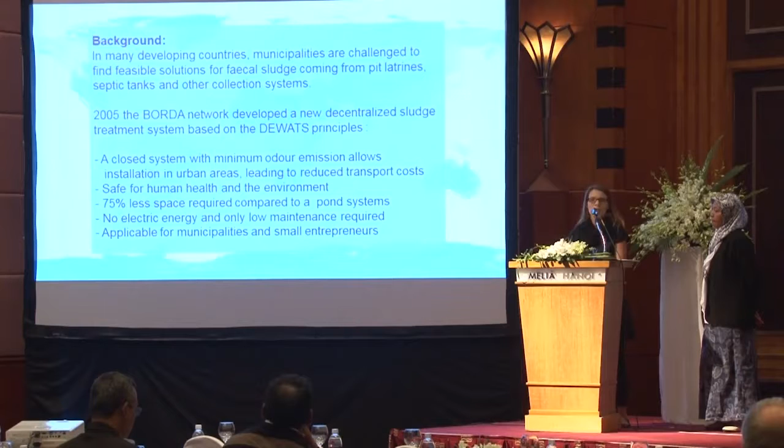Yes, as you know, the topic for today is how can municipalities or how can we ensure a safe and healthy fecal sludge treatment? This is the question, and our experience from BORDA Indonesia started about 10 years ago, so I guess this is quite an interesting presentation to see how things can develop over 1 decade.

What BORDA did in 2004-2005, we developed a demand-responsive sludge treatment plant for municipalities in order to complement the DEWATS systems we are implementing in our projects, basically CBS projects, community-based sanitation projects, to make sure that the disposal and the processing of septic urban sludge is done well.

So the treatment plants we developed are basically for small and medium-sized cities, and they collect septage from urban areas, on-site systems such as septic tanks, pit latrines, but also from our CBS projects. And they include biogas generation opportunity as well as composting opportunities.

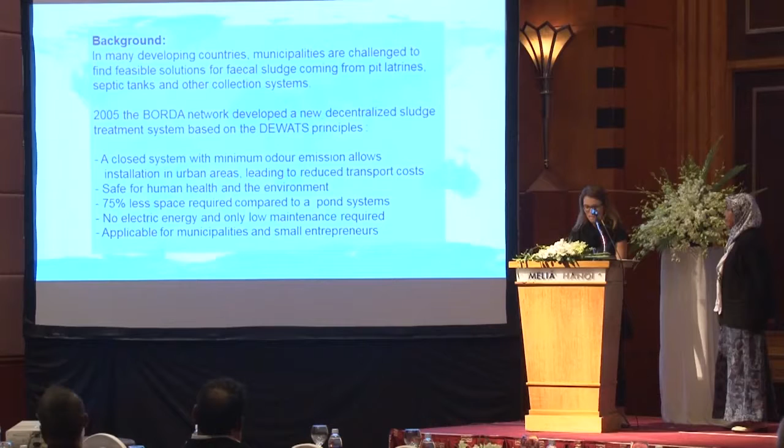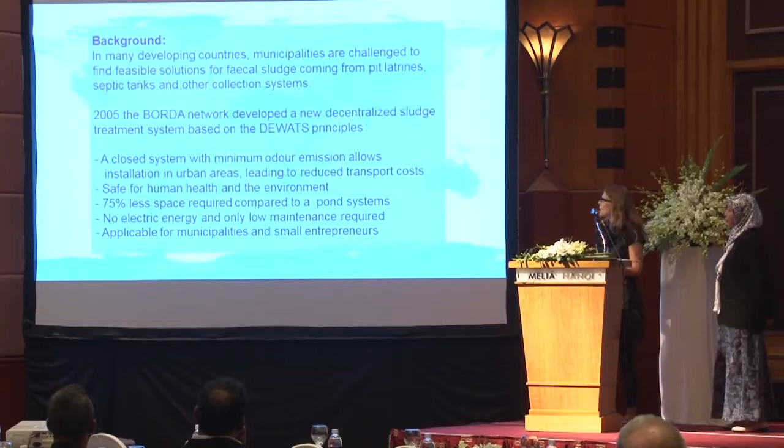So, in contrary to the, at that time, existing common treatment plant systems, our systems allow, as you can see on the screen, emission of odor to a minimum because it's a closed system. So it's easy to install in urban areas, which also reduces the transportation costs of the sludge. Besides, this leads to an increase of human health and environmental protection.

Yes, and also they would need less space than the common pond systems. Furthermore, less electricity or no electricity, and low maintenance is required.

So what were the challenges we are facing, or that we are still facing, in implementing such treatment plant systems in Indonesia? I think in most of the presentations, the aspects were mentioned already, but I will highlight them anyways again. So depending on the different kind of system or location, conditions in the surrounding area, we need to consider this when creating or developing a system. Besides, transportation costs are a key factor.

Besides this, as you heard already, the disposal of sludge often happens illegally, so the sludge is just disposed into the rivers. Furthermore, there's a lack of regulations. So also in Indonesia, there is no clear structure who is responsible, who should do what. In some cities there are, but it's not really connected and it's also not enforced. Besides, we need to think about how do we provide incentives for the service providers, basically the private sector.

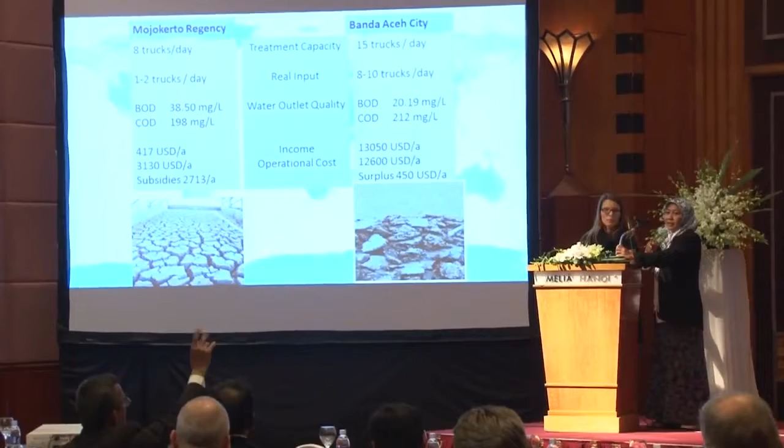That's the last question for the session. I'm sure there are plenty of questions. We can either do it over the break, or we have time after the other presentations to discuss. So, thank you for your presentation. I'm Susanna from University of Delaware.

I think you mentioned that these treatment plants are within the city limits, and I just want to know if there are any odor problems which the city faces, and if there is any backlash after a decade when you have reached the potential for wastewater treatment plants.

Thank you for the question. In the first slide, I think, we mentioned already that 80% of our treatment plant is a closed plant. So this is an anaerobic system. And then the effluent will flow to the planted gravel filter, the first open system, and then the maturation pond. So with this system, one of the advantages is that the odor is already reduced. And anyway, the treatment plant is located in the dump site. Yeah. So still nobody complains about the odor.

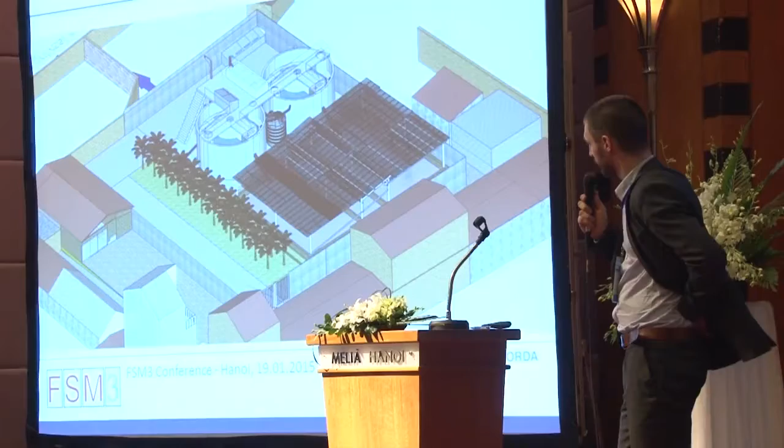Also, depending on the systems we are talking about, let me show you the backup slide here. That's a system which is also planned in Antananarivo, really in the urban area, and we really try to keep it very, very compact. This is 25 by 25 meters, where we also have a high groundwater level, so the digesters are constructed above ground with displacement tanks on top of the digesters.

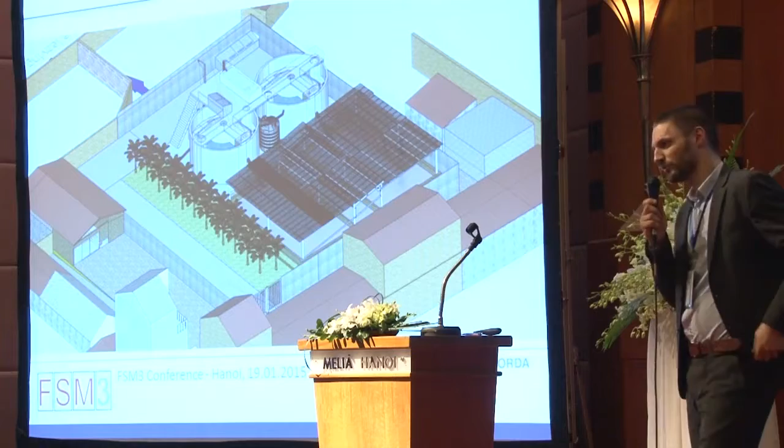So it's really ranging from what land is available. The more land we have available, and with low prices for the land, it's good to space it out more to have, for example, more drying space. So it really ranges. I can't tell you right now the number of square meters per fecal sludge treated.

Thank you. And there's the last question. So from your presentation, I understand that the main reason you wanted to switch to anaerobic digestion systems is because the ABR system did not work well, was sensitive to peak load, but you can make the same argument for anaerobic digestion-based systems, and in fact they're much more complex. Another point is if the starting material is septic sludge, that's already sludge that is anaerobically digested. So you are already losing the biogas, the readily digestible material is already lost.

And so from your presentation, I understand that one of the driving forces for choosing anaerobic digestion is also the biogas generation. But in the end, I do not know if this system would be feasible or if it would be an improvement over the first system that you started.

Thanks. Well, first maybe there was a misunderstanding with the ABR, because whether it's the ABR or biogas digesters, we have both anaerobic systems. The ABR in this case was only identified as not suitable for peak loads, since it is forcing the sludge all the way through the whole volume, flushing out the sludge. So that's the reason why we are right now not sticking with the ABR.

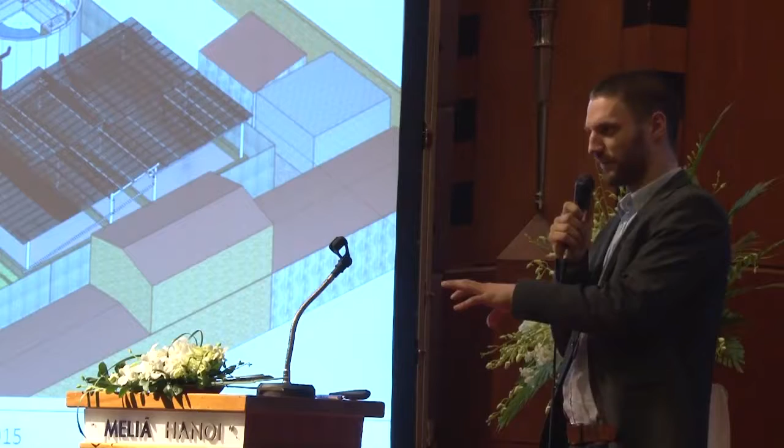And with the double biogas approach, we are trying to accumulate or trap most of the sludge in the first digester. We have a stabilization of the effluent anaerobically in the second digester. So that is the major motivation. And we have a digester which is more resilient to peak loads. So we still have solids accumulating at the bottom, and if a peak load is coming, it is not flushing out the sludge right away into our irrigation field.

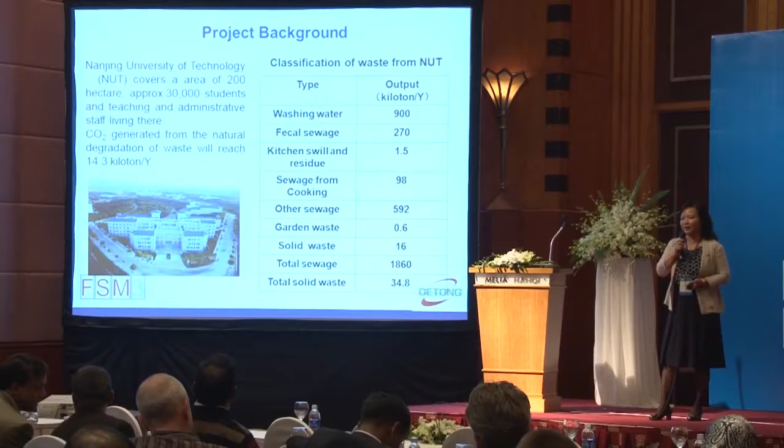We do co-fermentation with the fecal sludge from this university campus to make biogas, and we upgrade the biogas to methane gas to drive cars and buses for this university. The effluent from the biogas we have used for fertilizer, and with the liquid phase we have also done some research work to produce highly concentrated nutrient solutions for agriculture.

So this is our flow chart. One component is the CSTR. Oh, sorry. CSTR.

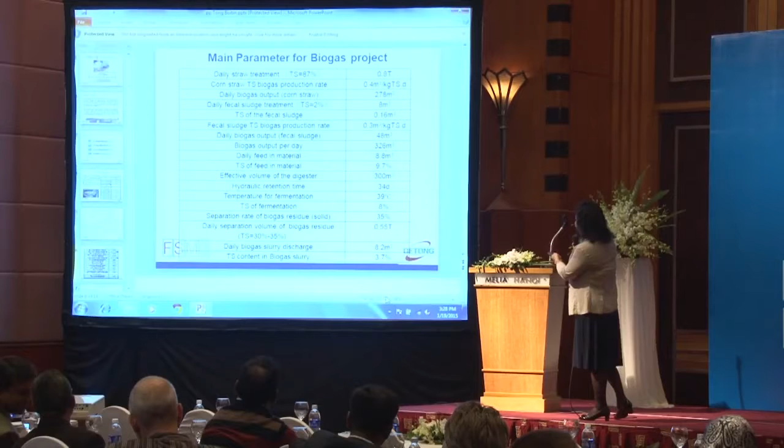This is the... Oh, sorry. Oh, okay, do it. Okay.

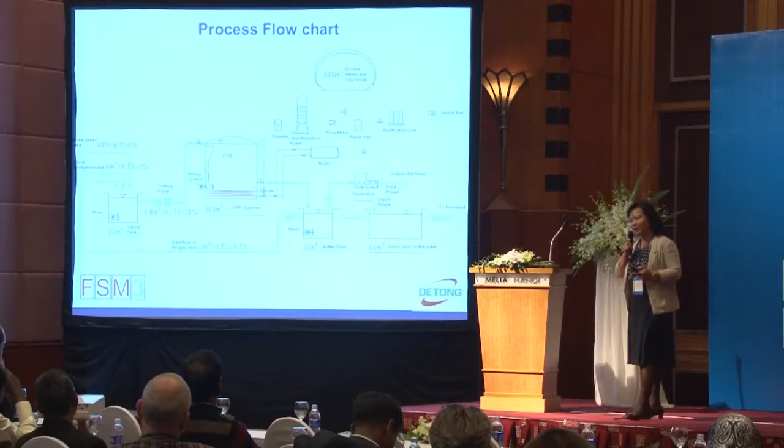Okay, we use a 300 cubic meter CSTR anaerobic digester. What's CSTR? Complete stirred tank reactor. So we have used some innovative technology with a hydraulic mixer system together with a gas mixer system. We have a special pre-treatment system for the straw, and very good technology for the separator after fermentation.

So these are our main parameters for the biogas digester. You can see the straw treatment with TS 87%, very dry, about 0.8 ton. We have faecal sludge about 8 cubic meters per day. So the total input material is about 8.8 tons and cubic meters per day. We will produce about 330 cubic meters of biogas per day.

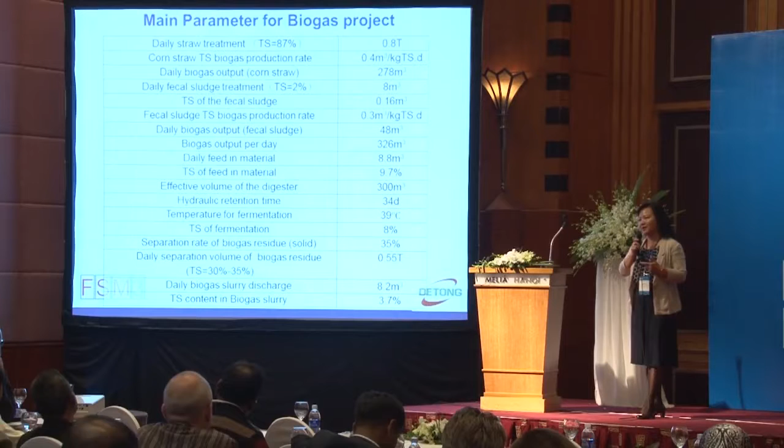This produced biogas will feed into the PSA system to produce methane gas for driving cars. The effluent from this biogas will produce solid biofertilizer and liquid biofertilizer. We use a temperature of about 40 degrees centigrade, mesophilic fermentation technology.

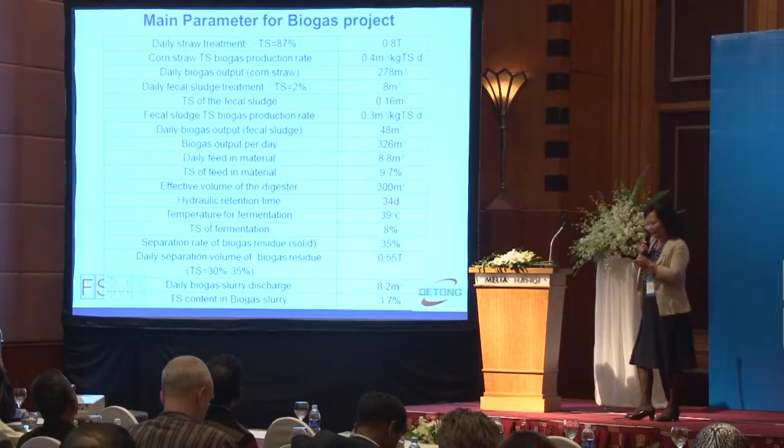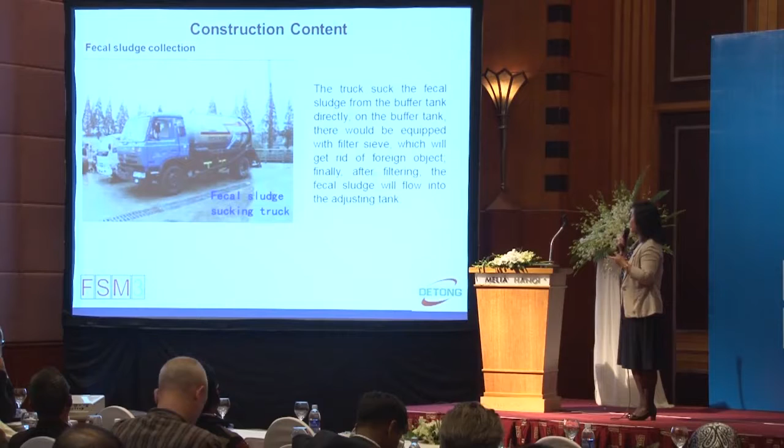So this is our raw material collection system. We have two kinds of raw material for fermentation. One is the faecal sludge, which we collected from septic tanks in different places in this university. We also collected straw with pallets to transport to our biogas plant. We use this truck to suck the faecal sludge from different septic tanks and use a special sieve for foreign objects that removes these foreign particles.

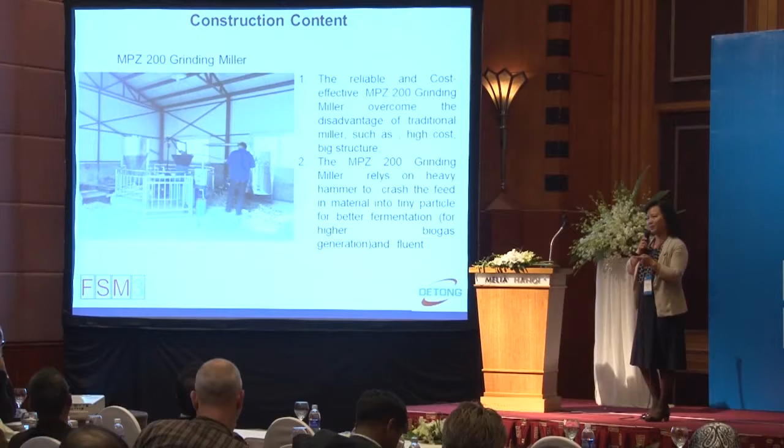This is also very important for the treatment of the straw. You know, this straw is very long, sometimes very difficult to treat. We have used special hammer mills from Germany, this know-how from Germany, to make the particles very small, less than 3 mm, as feeding material. We have used recycling of the effluent to increase the bacteria to get very high biogas output.

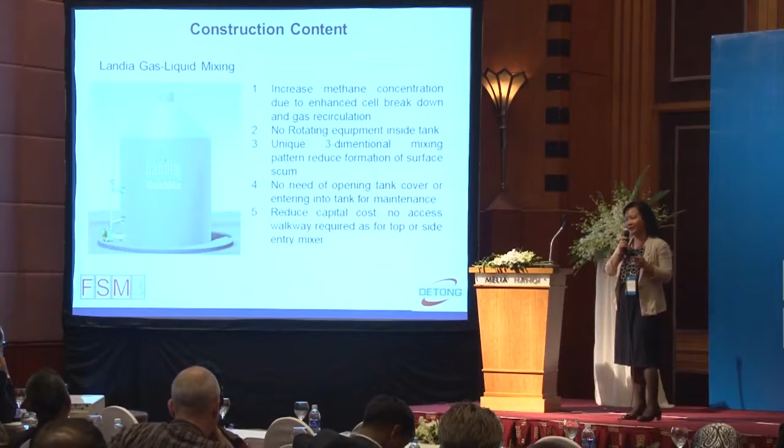This is also a special gas-liquid mixer. We call it gas and hydraulic mixer system integration, because in different areas of the tank, this straw is very difficult to mix, sometimes with a swimming layer. It just makes a block in the digester for the effluent and influent. That's a big problem. We have resolved it.

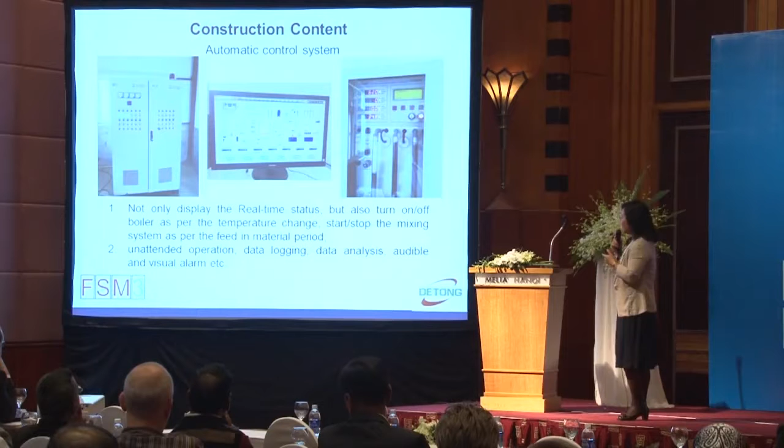We also have a membrane gas storage with 300 cubic meters. The produced biogas is stored in the gas membrane storage, and then this is our controlling system. We also have an online gas analyzer for methane content, CO2 content, H2S content, O2 content, everything automatically. So this is some equipment for this biogas digester.

We finished this digester last year in July. After the biogas digestion and storage, we use this PSA upgrading system to get methane gas and drive the car. The methane content can reach 97–98%.

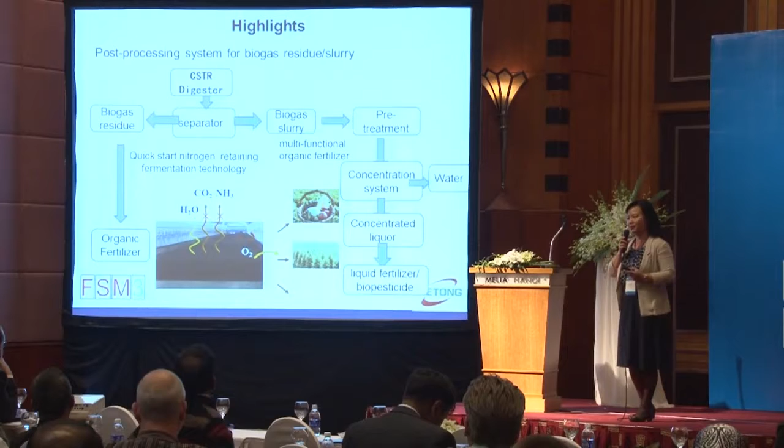So you can see this is also our output. Most important is what we can use from this output. We have gas, which we use for cars. We have effluent: solid effluent and liquid effluent. We use it as biofertilizer with very high value, much more expensive than normal compost.

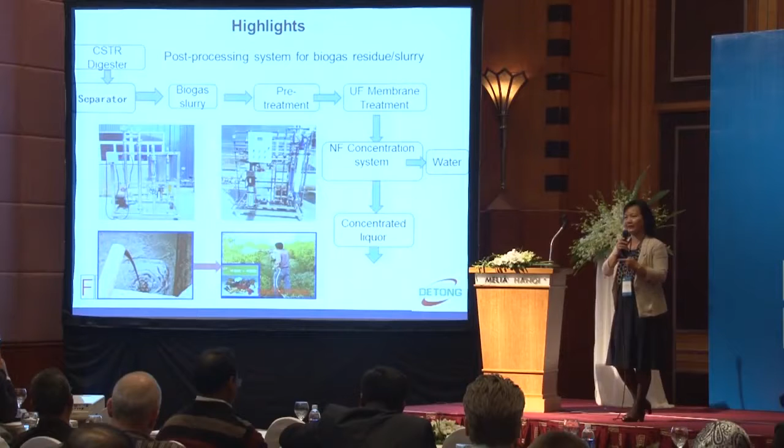We have made some scientific analysis with a project from the Science and Technology Ministry. We try to sell it for some big money. We want this project to operate economically. That's most important, because produced biogas can also make electricity. But I think if you make methane gas, you can get 4 times the income value than making electricity in China.